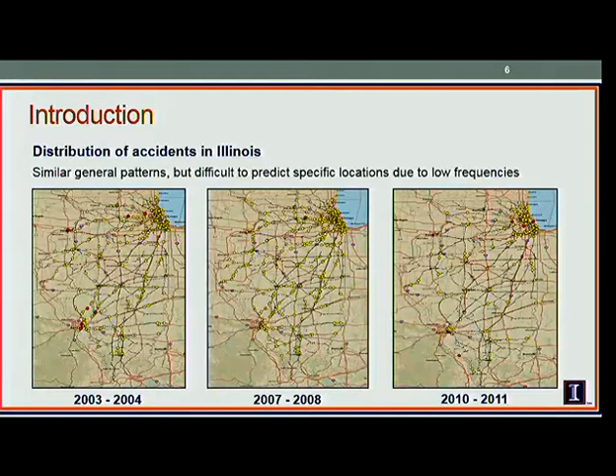More roads, more population, more accidents, as you can see clustered in the Chicago area. If we look at Illinois data and consider this a sample of national data, there are close to 5,900 crossings in Illinois.

Not all of them have accidents. About 87% did not have an accident in the past 10 years. Please recall this is 10 years of data, not 1 year. So roughly 13% of crossings had accidents in the past 10 years.

The national trend is pretty similar: 12% of crossings nationwide had accidents in the past 10 years.

But there are locations that have repeated accidents. For example, in Illinois there is one location that had 9 accidents in the past 10 years, and another at 7. There are locations with 4, 5, and 4 accidents, and so on.

So the idea that accidents are completely random and we cannot do anything about it because they're going to happen is not necessarily true. If you look at that, there are 48 locations with 3 or more accidents. This particular location with 9 accidents—I can't say that's random. There's no randomness there; there are repeated accidents year after year.

So if that's happening, can we learn something from that and do something about it? Our goal is to look at one accident, one grade crossing, and try to learn from that and see whether that trend holds for others. And if there are clear trends, can we incorporate them into our models so that our predictions are more accurate?

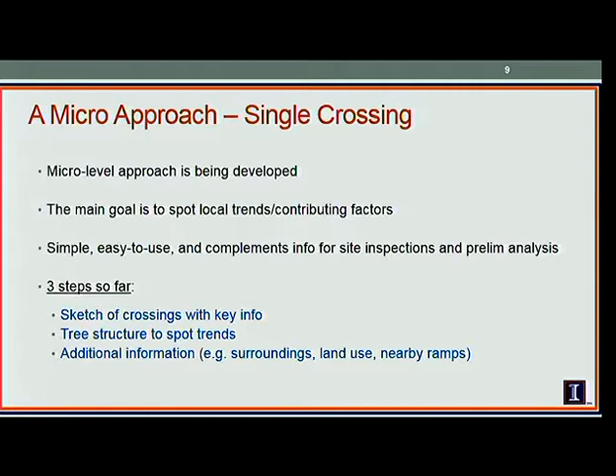So we take that approach and say, okay, it looks like based on that simple diagram, there is something actually identifiable there. Let's look at the total number of accidents that happened there and divide that based on highway user types. Were they pedestrian accidents, car accidents, or other modes? And what was the action of the motorist at that time? Was the person driving through the gate? Was it stopped on the gate? And so on. These are all elements that are coded in the database.

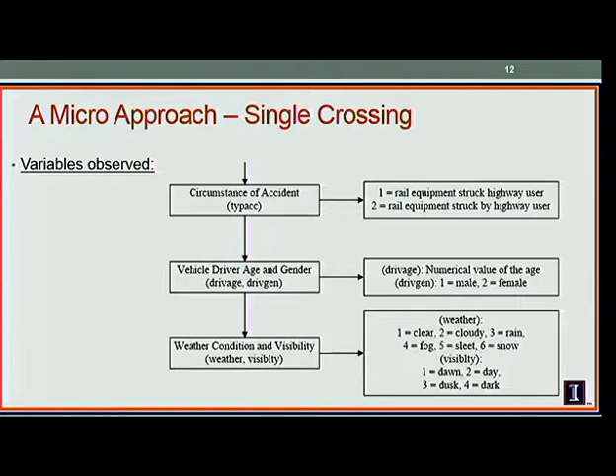And this continues: what was the circumstance of the accidents? A little bit more about the drivers, what was the driver age and gender, and what was the weather condition. And if we group them like this, what do we spot? So we actually did that. We took that location with 9 accidents, and one of them was a pedestrian accident. So okay, let's put that one aside. These 8 of them are all motor vehicle accidents. And then we went through that division, okay?

The first level we looked at, what happened? What was the motorist's reaction? Drove around the gate, 4 of them. Other types, 4 of them. And then what direction was the vehicle? Vehicle was northbound. If you look at those highlighted trends, it seems that it's telling you something.

Vehicle is going northbound, train is going eastbound. 4 out of 8 accidents happened there. Okay? And the other one you are looking at is vehicle going southbound, train going eastbound. So it looks like in this case, the trend is pretty obvious. It's there. All we did is just take the data and plot it this way.

We are not saying that every crossing is going to have this trend. We did another one with 7 accidents and tried to find any trend there. No trend was shown. So in one case it was clearly there, in another one it wasn't.

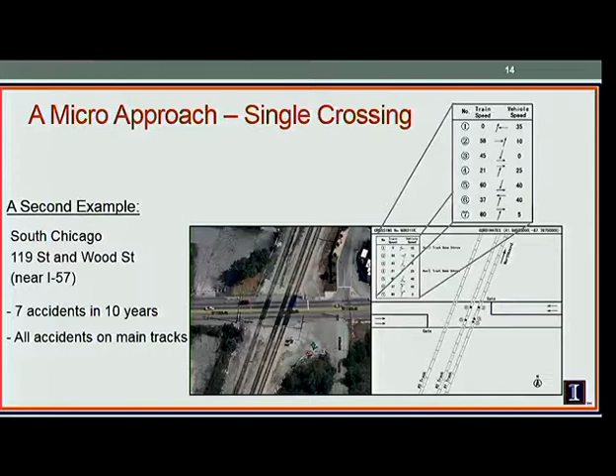Then we looked at another location. This location had 7 accidents, and no matter how you divide that, there is no clear pattern. There's just 1 here and 2 there, 1 there. As a result, there is no particular trend related to the driver maneuver, the age of the driver, and things like that. So this is the location with 7 accidents that doesn't show the trend.

We continue to say, let's look at a third example. In this third example, we have 5 accidents, 4 of them showing that the vehicle stopped over the gate. It looks like right from the beginning there's going to be a trend there, 1 versus 4.

Then we continue looking at that, and it looks like in terms of vehicle going east or vehicle going west, there's not that clear trend, even though the vehicles going west have more than those going east. Then we looked at the train direction. It looks like there is no clear trend—there's an eastbound trend and a westbound trend. As we get to the last layer of that, it seems there is no obvious trend like in example 1, which was jumping out and saying, here I am.

But one thing we noticed: if you look at the age of those people involved, 4 out of those 5 accidents involved drivers older than 80, and the youngest one was only 61 years old. So we have 5 accidents, all of them older than 61, 4 of them older than 80. There is no further information in the database to find out why.

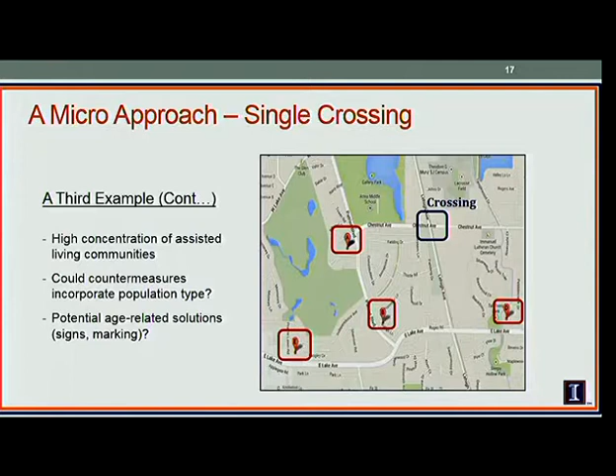Now we said, okay, let's look at the common models that predicted the accidents and see whether these common models actually use any of those variables. We saw that, no, they don't. So we said, well, let's look at the common model and hopefully see if we can incorporate some of these findings into the common models.

For example, in the first 9 accident locations, we have an angle issue. Is angle included in any of these prediction models? Is age included in the prediction models, and so on?

The second part of this presentation is basically going to go through this aspect—what is the current state of practice in terms of predicting these accidents. Based on the microanalysis we did, where we spotted certain trends, if we incorporate those into the models, can our prediction get better, or do they contribute nothing to that? So Dr. Juan Medina is going to be making the second part of the presentation, discussing how we incorporated the micro model into the macro model.

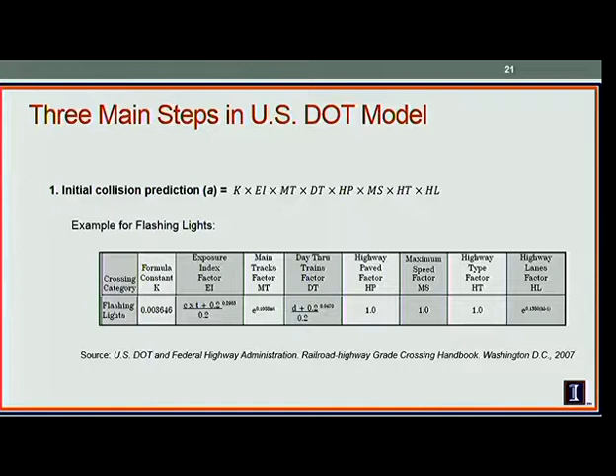And this same table, in this case, is shown for crossings using flashing lights as a warning device. It has two more categories, one for passive warning devices, or crossbucks, let's say, and then one more for gates, or gated crossings. It's important to note that in the 80s, we didn't have four-quad gates, for example. That's one big difference that, of course, we don't see in this model. So that's the first step, finding an initial collision prediction we're calling A.

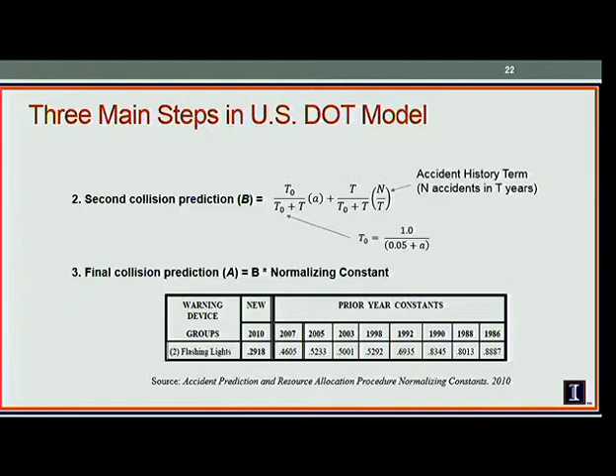And you see in 2010, looking at the first or second column in the table, that now accidents are about 70% of what they were in terms of number compared to the 1980 model using the 1975 database. So it reflects what happens on a nationwide basis. That's the way these numbers are calculated, such that the model will predict the total number of accidents that we see for the whole country. So that's the state of practice. That's what a lot of jurisdictions use, and that's what's actually implemented in the FRA website methodology that anyone can access.

So are there other alternatives, we're asking now? Or can we just see how this model compares to more recent models that we can develop based on current databases? So we use data from Illinois as an example. This is kind of a first step. This is not conclusive, but we wanted to see how, for a state, using a considerable amount of data, 10 years, we do in terms of prediction compared to the current practice. We tried a few models, and at the end, we had the best fit using a modified version of a negative binomial distribution that had extra zeros, what is called the zero-inflated negative binomial model.

So for testing purposes, we wanted to see the actual prediction power of the model. So 5 years of the 10 were used for model building. And the next 5 years, in this case from 2008 to 2012, were used to actually check if the predictions were good. So we're assuming we're in 2007, and we're trying to predict those next 5 years. In addition, we could have done this differently, but we tried to make the comparisons mimic what the current model did. So we divided the crossings also into the same categories: passive warning devices or crossbucks, flashing lights, and gates.

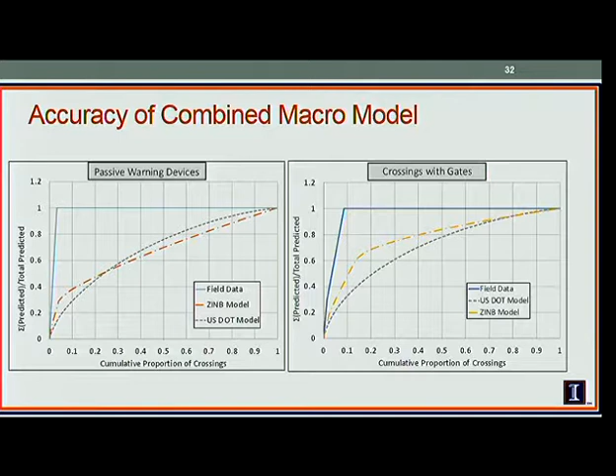And in the same way, we see for the other two categories how the dashed line, the finer dots or dashes, which is the USDOT model, cannot mimic that sharp increase, skewing that distribution further to the left. So that's one way we can compare the models, and we kind of see in a visual way how they did. A different way is the actual ranking of those high accident locations. And that's what the states would, in practice, be using the models for.

So for improving the crossings, what they normally would do is, out of the whole pot of money that you have for crossing improvements, you would have to see to which crossings you're assigning this money to, right? And that's when this ranking system comes into play.

So if you take the top 10 high accident locations in the predicted years, and we see how many accidents we actually predicted with our models, we see that we can do a little better than the current state of practice. That applies for all three categories, and for both, let's say if we pick top 10 locations for improvements, or if we can do improvements in top 20 locations.

So in summary, we can see that improvements to the state of practice are needed, both in terms of accuracy and in identifying the contributing factors. That will lead, hopefully, to better countermeasures as well. You put your money where you actually have those most important needs.

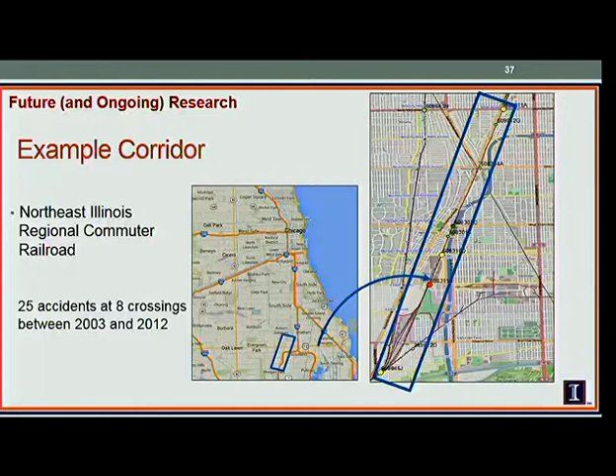This is an example of a crossing that we identified as important. So we start seeing the number of accidents, and then think about the combinations that we can have. These 8 crossings, we have 25 accidents, for example. And we're not showing the results here, but there are some trends that start emerging, like the direction of the trains is very important. For example, out of these 25 accidents, about 18 happened for southbound trains.

The combination of micro and macro approaches can be done in different ways. One may simply add the variables, or we can also add dummy variables to include those in the macro model. We can think of different classifications, as I mentioned at the beginning, by dividing, for example, gates into quad gates and 2-gated systems.

And finally, one topic that we believe is important is how we weigh that past history into the predictions. Is it the same that in the 5 years you had 2 accidents in the first year compared to 2 accidents in the last year? That's something that we'll also analyze in the temporal way.

And finally, the extension of this approach to other states, different types of regions, and try to generalize it for wider use. So that's where we are now, and we're going to continue working on this. And I think this is the end of the presentation, and we'll open for questions.

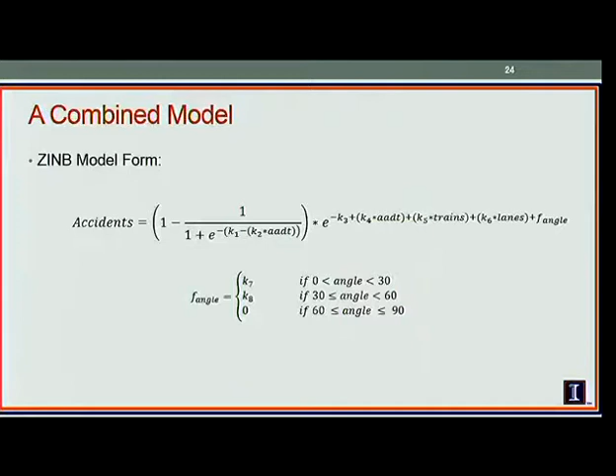I have a question for Ray. In one of your early slides, you showed the distribution of the number of crossings and the number of incidents you had at each of those crossings. The null hypothesis could be that it's random, and I would think it would conform to a Poisson distribution. Did you test that hypothesis? You probably heard the question, right? No, we did not actually test that.

When you plot the distribution, it clearly looks like a Poisson distribution: a very tall bar showing 0 accidents, very quickly it drops to 1 accident, and drastically drops to 2 and 3. So no doubt it's going to look like a Poisson distribution if we test that. But our idea was that even though the shape may look Poisson, what is real is that there are repeated accidents at a certain number of crossings, and that should show a trend. Assume the occurrence of accidents is Poisson, but 9 accidents happening at one location cannot be a statistical event. It's a real event. So we wanted to see what's causing it, regardless of the shape of those distributions.

And is there a trend in those 9 locations that can point out to something? And in this case, it did, to the angle. A little bit on that.

We actually did, for the macro, try Poisson and negative binomial before going to the zero-inflated version. And we couldn't replicate or get even close to the variance when it comes to the Poisson or even the negative binomial. That's why we added that zero-inflation term. So for the macro models, we actually did look at the Poisson and the negative binomial. And you're saying it did? It did. It did fit relatively well, but the zero-inflated fit better. That's why we went with that one.

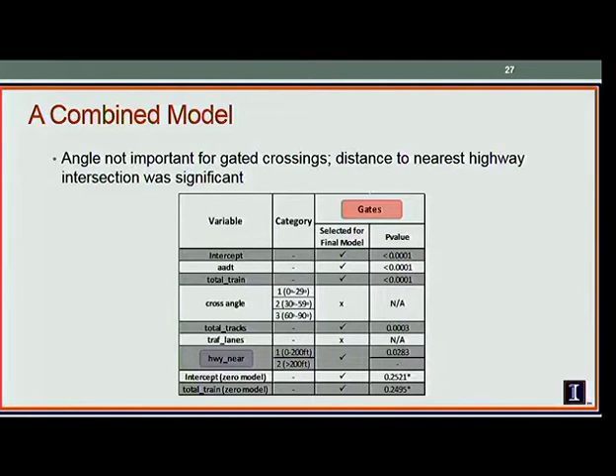Hang on. So this question is in regard to one of those multi-accident crossings you described, in particular the Nagle UP, Union Pacific Northwest line.

The question is, how did you determine the direction the train was traveling in these incidents? That was tricky, because we couldn't find the timetable direction clearly. But we know the train is going either south or northbound, or east or westbound, based not on the inventory but on the details from the individual accident records. However, sometimes the train could go east or west, or north or south, so it took a little figuring out. In this case it was clearer, because there's a way to discern which direction, but for some cases it wasn't that clear. So it's coming from the individual accident records, the direction the train was traveling based on the accident report, from the form that ends in 57 from the FRA. This particular participant pointed out that this is the UP line where they run left-handed, so to speak, or opposite from most of the rest of North America.